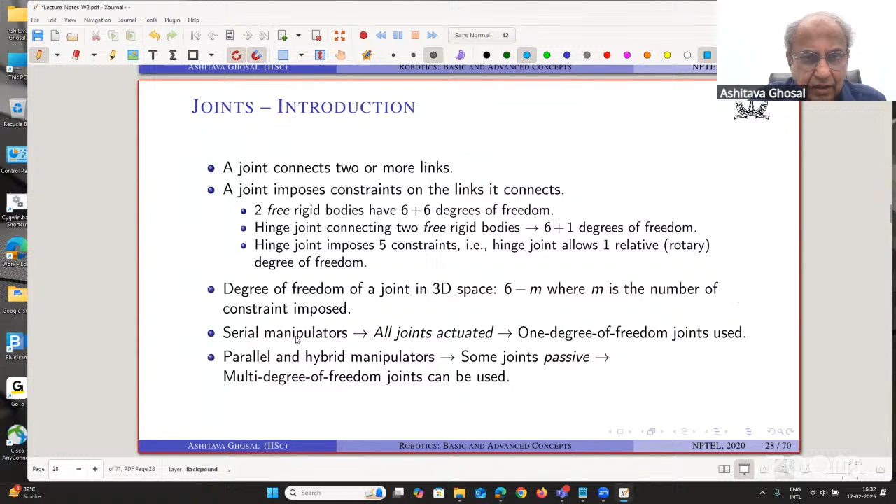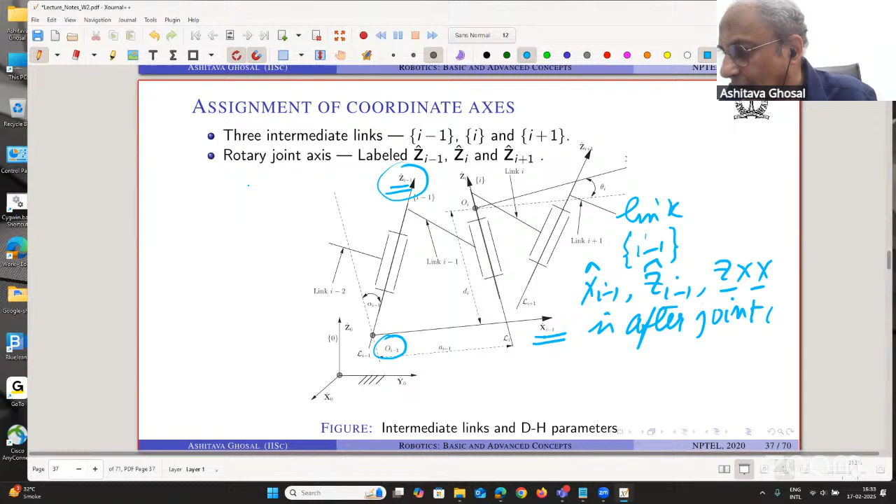So the whole idea is link I minus 1 is after joint I. So this is joint axis I minus 1, this is joint axis I, and this is joint axis I plus 1. So this link is after the joint.

As I was saying, for link I, there are 4 DH parameters. One is alpha I minus 1, which is this twist angle. Then AI minus 1, which is the link length. And then there are theta I and di.

The problem is in any convention, some of these have I as subscript and these two have I minus 1 as subscript. Yes sir, okay, so this is confusing to everybody.

So in order to avoid this, some people will say the link is before the joint, then this is labeled as I plus 1, all kinds of things they will do, but you can never avoid this problem. So what I am giving you is this convention where two of them have subscript I minus 1 and two of them have subscript I.

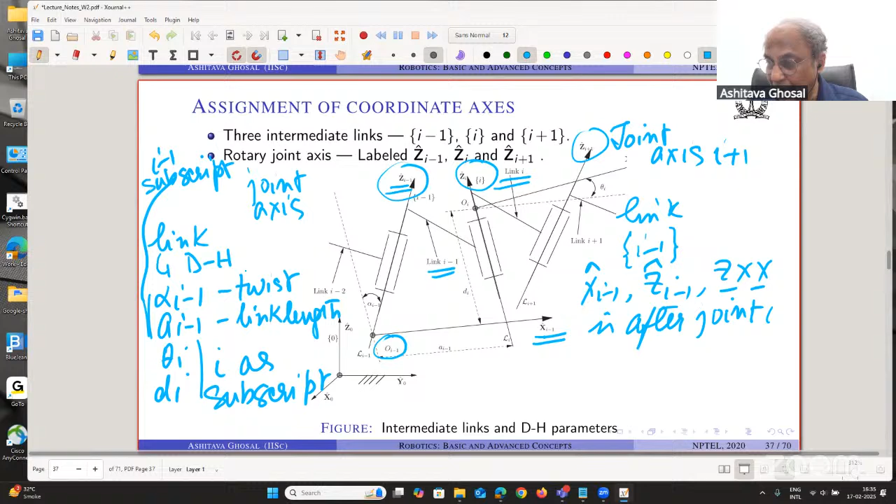The advantage of this convention is that out of these 4 DH parameters, as you may have also read in Saha's book, 3 are constant and 1 is the variable.

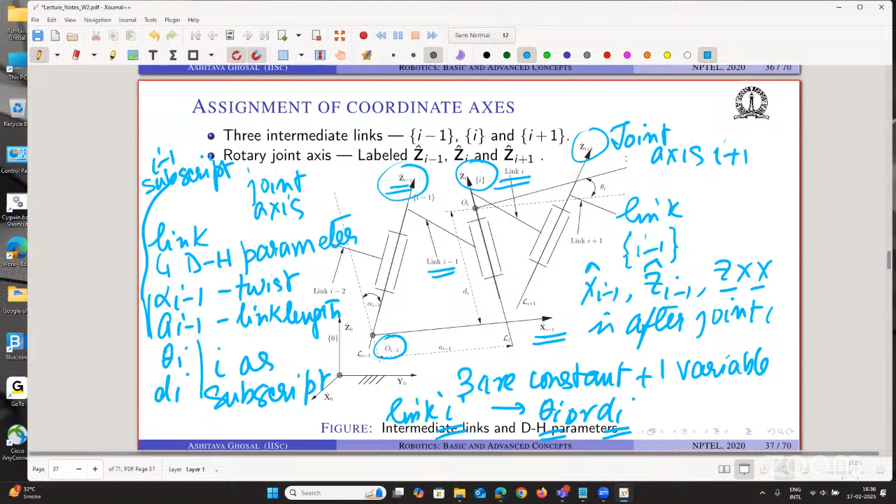So for link I, the variable is either theta I or di. So at least this I and this I and this I are consistent. This is the big advantage of this convention, that the variable for link I has a subscript I.

Okay, so this is one advantage, and then there are some other advantages. One is that if you have what is called a tree structure, this is the only convention which works. Do you know what a tree structure is? No sir. Okay, I will show you.

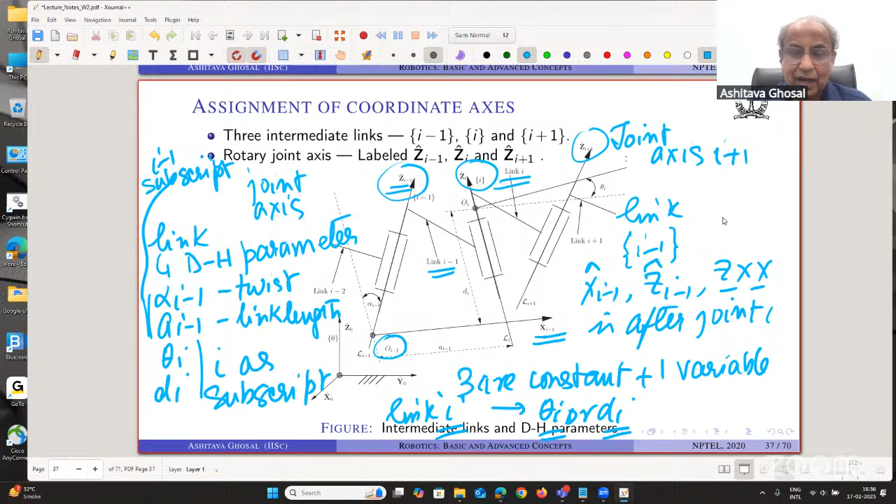So once you have this convention, then there are these 4 DH parameters. As I said, this is for link I, but unfortunately two of them have subscript I minus 1 and two of them have subscript I.

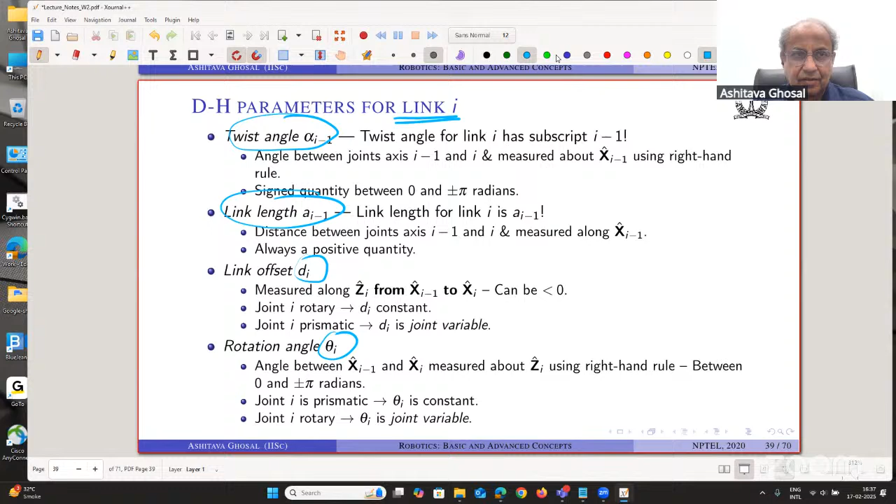So let me just show you what is a tree structure and where this doesn't work. Okay, just give me a minute.

I think if you go to week 8, week 8, no? Is it in week 8, right? Is it in articulated body, week 8? Yeah, articulated body. Week 8 slide, slide number 71. No, no, yeah, it's week 8.

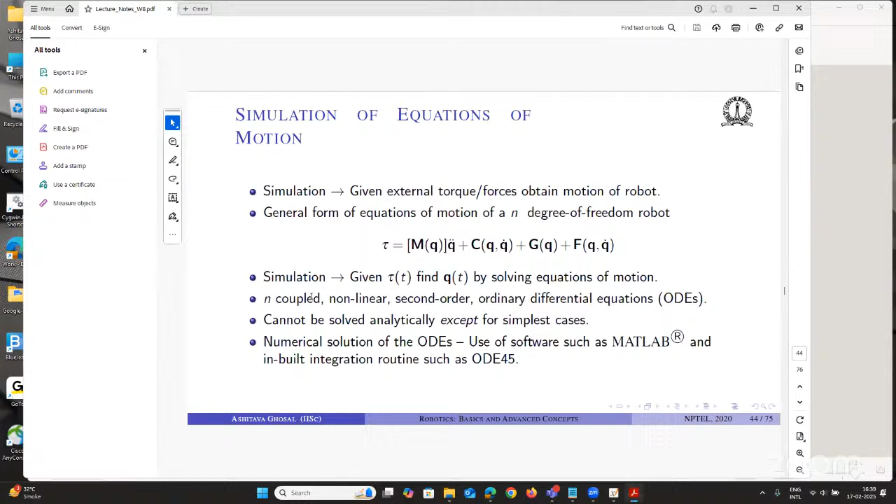So if you have a structure like this, there is one fixed node and then it is connected to two arms. So you can think of it as like your body. This is what I wanted to show you. So in your body, there are two arms, one and two.

Okay, so if you look at, let's say, node 7, which is joint 7, so if it's like this, you don't know where you are coming from. So if your link is before the joint, okay, this is one way of doing it, but let me just try and find one more simpler way.

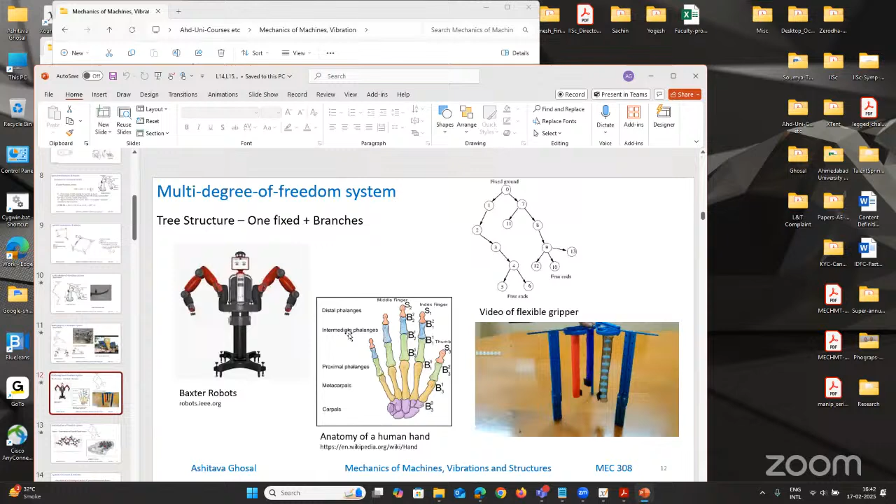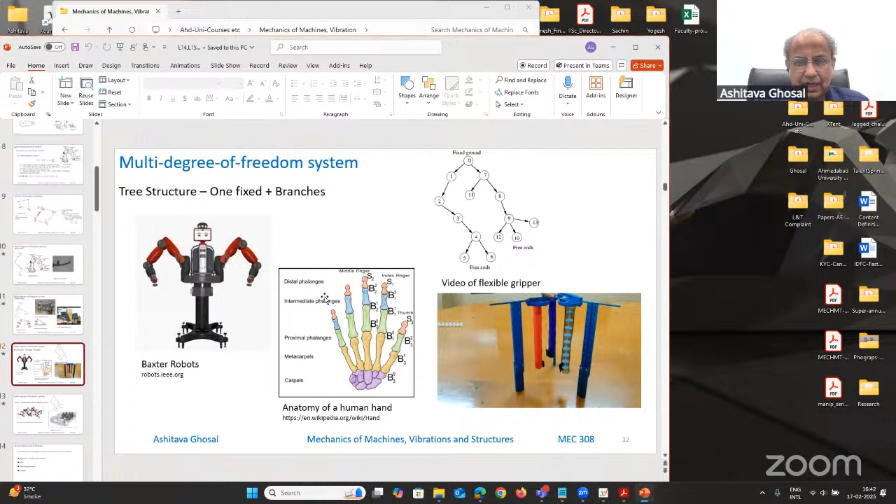Yes, sir. Okay, so you see any of these three pictures. So this is the anatomy of a human hand. Okay, so if this is my joint, this is like the palm. Okay, so if the link is after this joint, okay, so from here, you don't know where you are coming from.

Sorry, if the link is before the joint, with a zero fixed ground, sir, for example, this joint here, okay, you can have one link coming here, or you can have seven, many branches which are starting from the same place. So in a tree structure, from this fixed point, there are many branches. Okay, so I can easily, following my convention, say that this link is after this joint. But if you use Saha's convention, you will have problems.

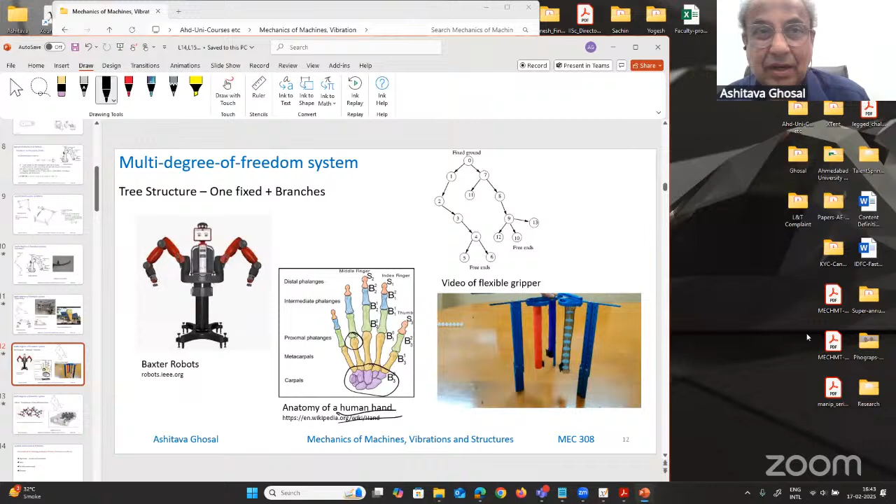Okay, sir. Anyway, so it doesn't matter. It is, as far as these normal things are concerned, the same. Okay.

So let's go back to this. So this is the DH convention. Is this clear now? I'll show you some examples after this. Okay, sir, yes, it is clear.

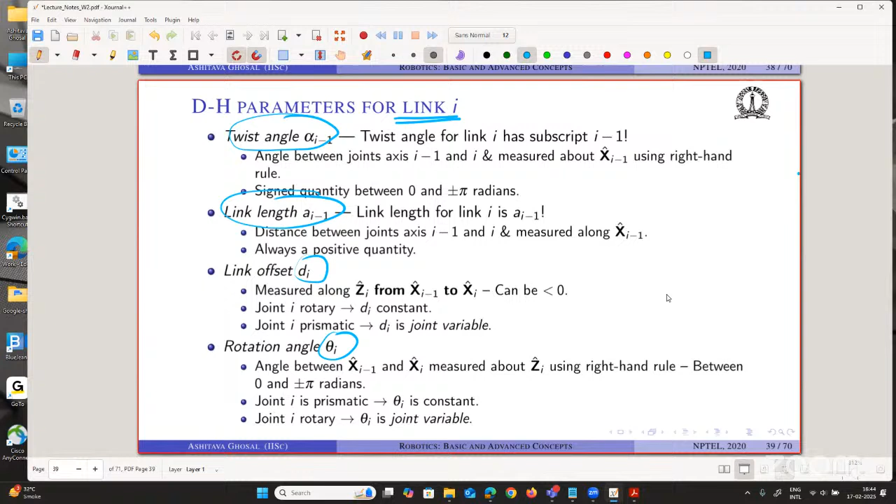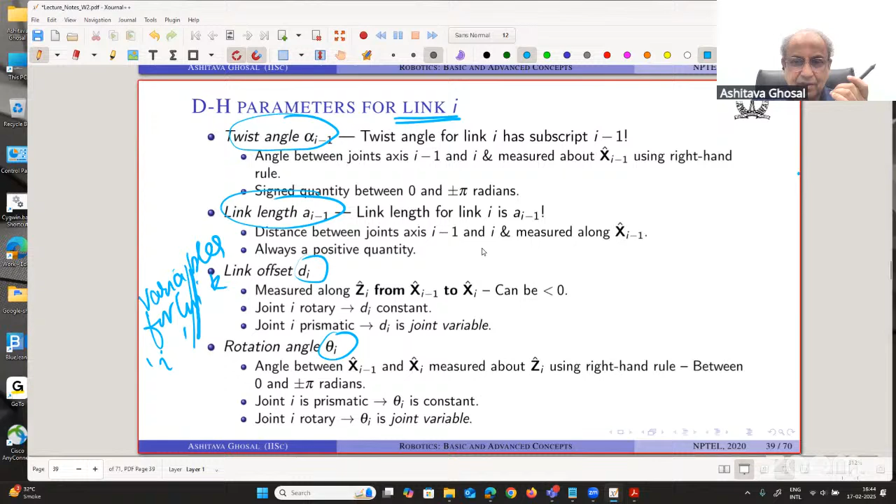So there are two quantities which are with I minus 1, and there are two with I, but fortunately these are variables for link I. Okay, so it is good that way. The constants have other subscripts.

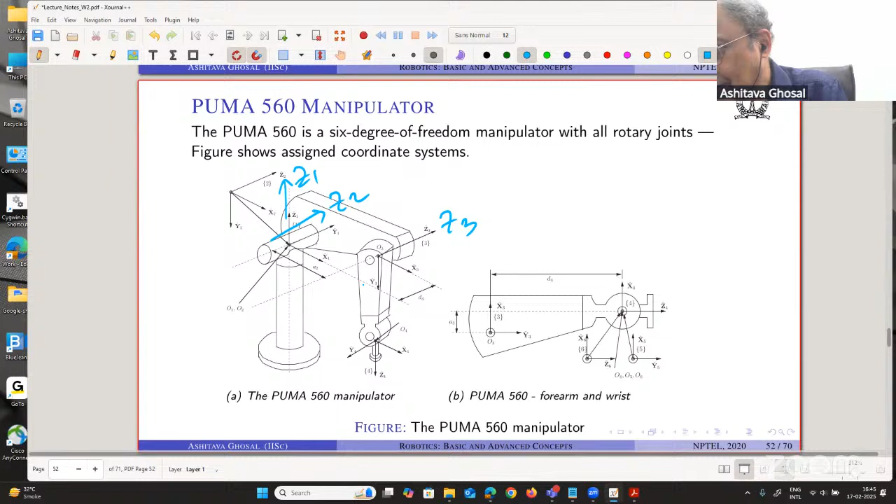And hence, when you do the DH parameters, for example, for link 2 - so which one is link 2? This is link 2. Okay, so for link 2, you can see that there'll be some distance and some angles. So for link 2, it is minus pi by 2, 0, 0, because it is the angle between Z1, which is upward, and Z2. So it is this angle.

Okay, sure, so alpha I minus 1 in this example is minus pi by 2, either 270 or minus pi by 2. And what is A I minus 1? This is the distance between Z1 and Z2, that is 0.

Yes, okay sir. And then you have theta I, which is this angle theta 2, and then you have D I, which is constant. So this is for link 2, the way we have drawn it, and this is link 2 after Z2. Okay.

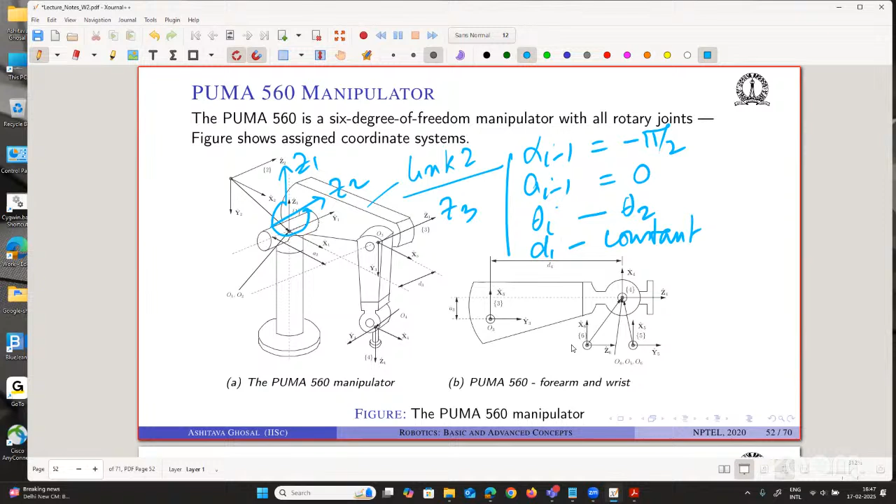So you have to give me some time. Actually, Jacobian will come a little bit later. So we are in week 5 right now. So in week 6, next week, Jacobians will come in. So maybe you can wait, or maybe you can read ahead a little bit because all the material is already there.

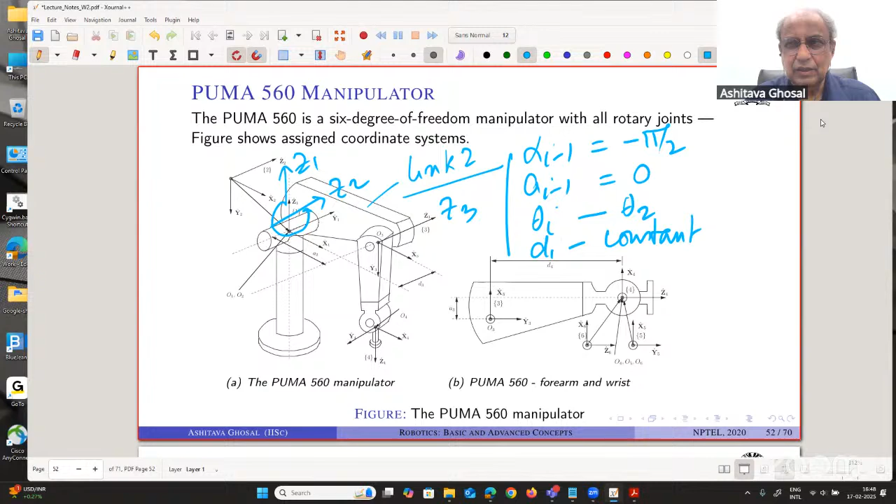Okay, so but you need to. The coming week will be velocities and all those things. Okay, fine, that will be when you have the Jacobians. So. Yes, sir.

I need to come out of this. Let me just try to come out of this. No, it's not working. Okay, I will come, I will do this.

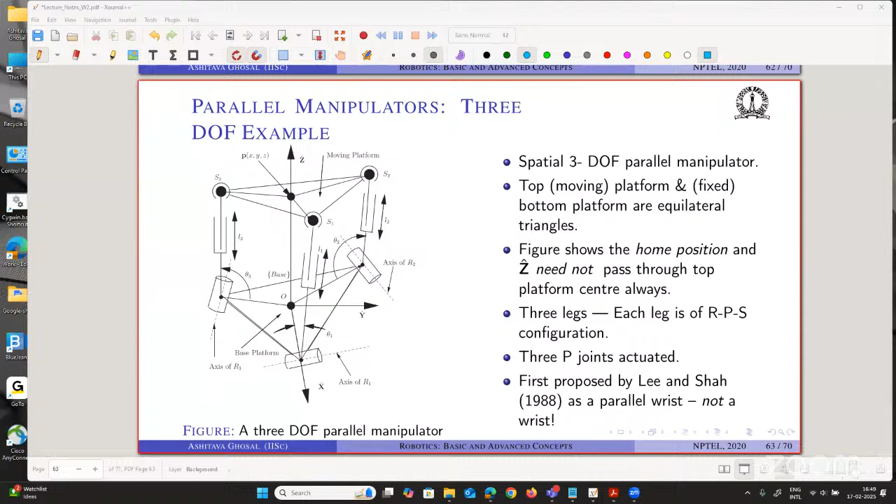Okay, so now let me share the screen. Can you see? Oh no, this is.

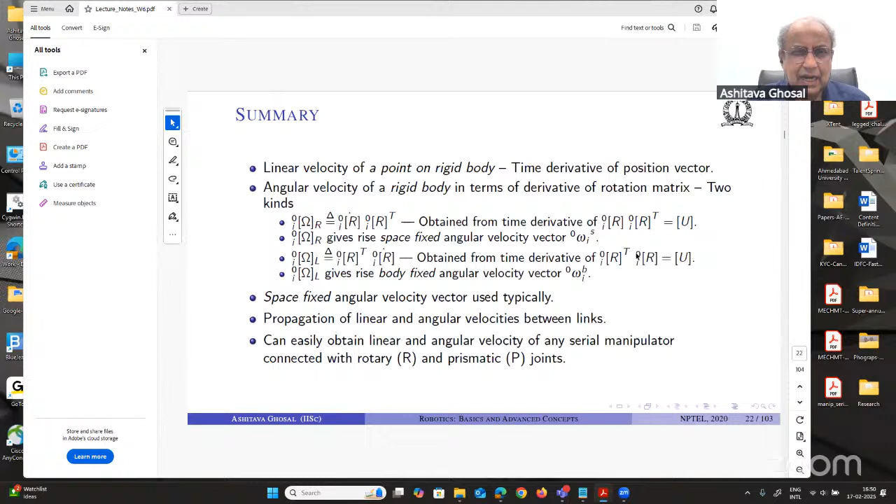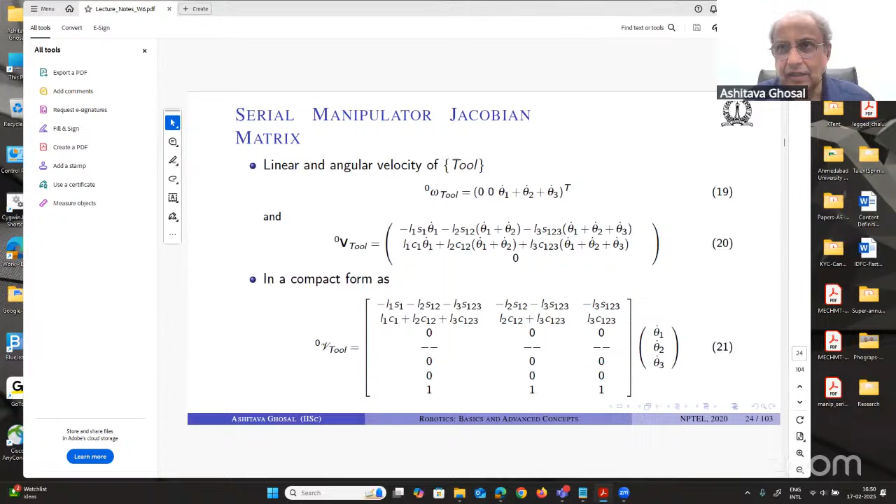Okay, so the basic idea of a Jacobian is that basically I know the angular velocity and the linear velocity of the end effector. So for example, the angular velocity, this is for a planar 3R. So this example is for... as usual, I have not done it properly. Just give me a minute again.

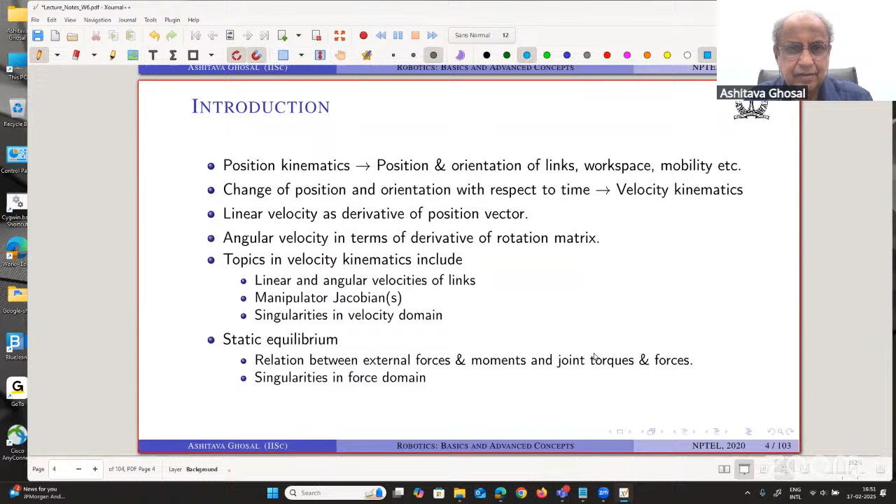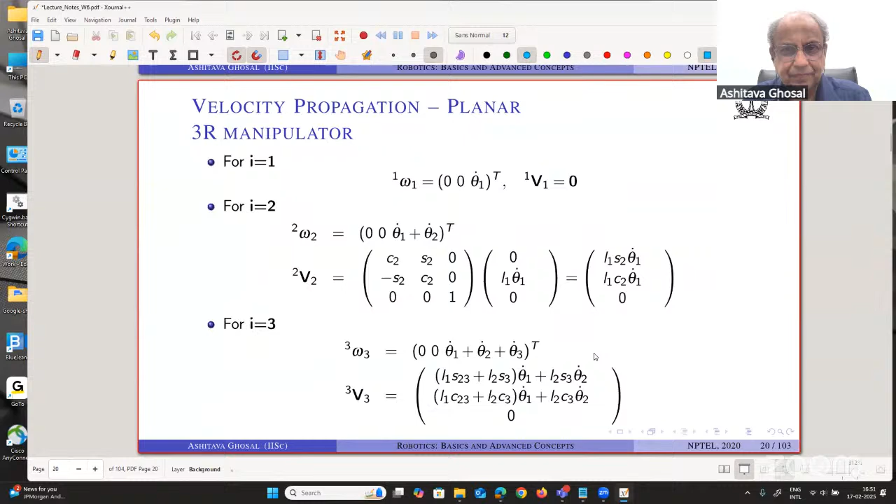So in this, for this end effector, this is the angular velocity. This is the zero coordinate system, x, y. You can see, this velocity is from the origin, fixed, that is why this zero is there.

Okay, so it's sort of easy to understand that the angular velocity of the end effector will be theta1 dot plus theta2 dot plus theta3 dot about the z axis, which is this. And the x and y components will be zero.

Similarly, the linear velocity of this point will be this. There'll be some x component, there'll be some y component. And the z component will be zero. This is the z component.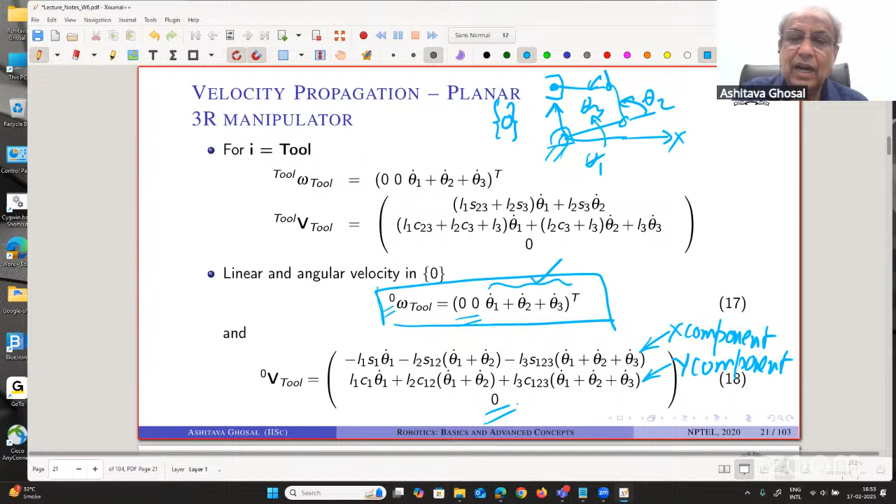So the idea of a Jacobian is that I want to write this linear and angular velocity in terms of joint velocities. So end effector angular velocity and linear velocity in terms of joint velocity.

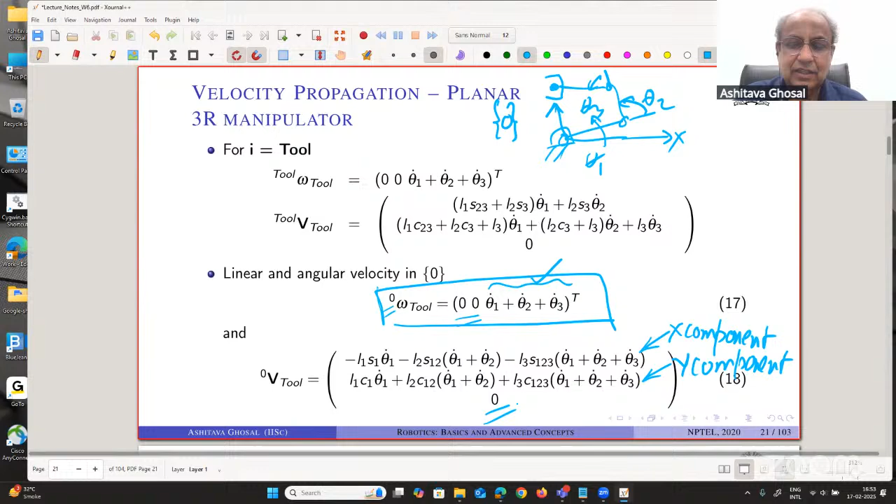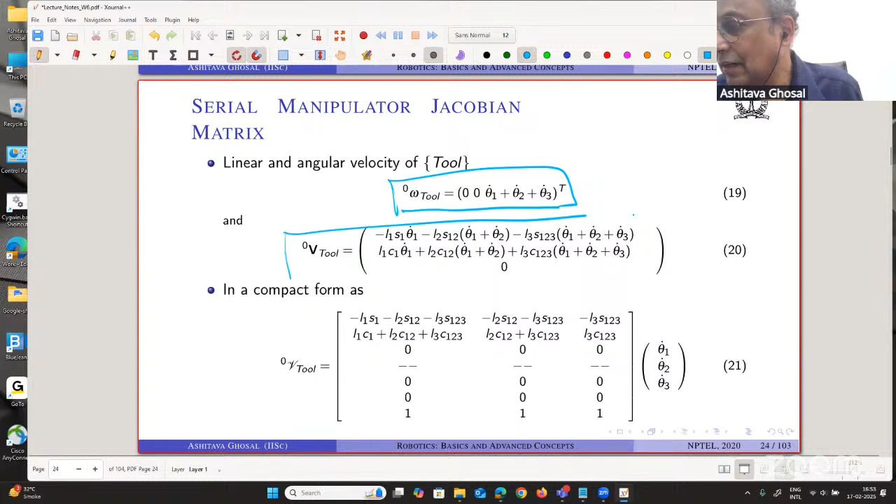So once again, this is the angular velocity and this is the linear velocity. You can see this is a 3/1 vector, and this is also a 3/1 vector. So what I want to say is this quantity on this side is v, the linear velocity of the tool in the zero coordinate system, and this is the angular velocity of the tool in the zero coordinate system.

And this is given... this symbol means that. And we can reorganize these 3 plus 3, 6 equations in this form. So this matrix is called the Jacobian matrix.

But here the end effector is also considered? Then the matrix will be different? No, the end effector is being considered, L3 is here. So in this picture, this is the end effector, of course, for this planar example.

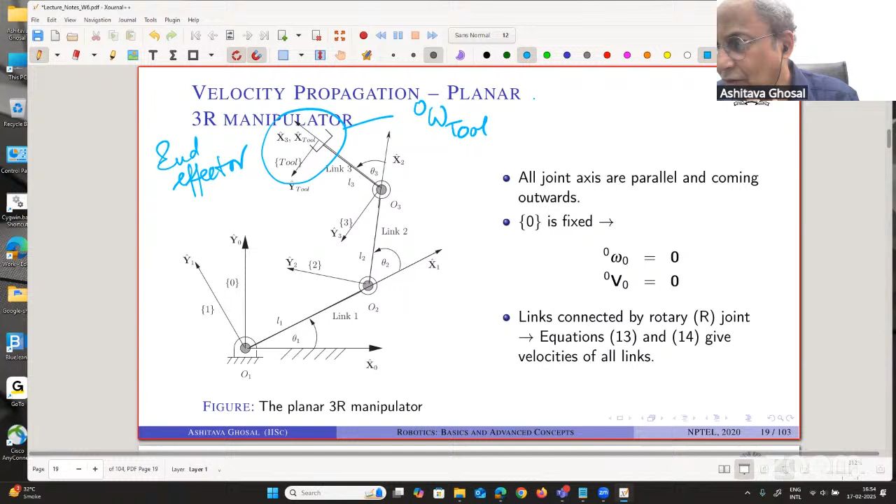Okay, so I am trying to write the angular velocity of this end effector. In this case it is called the tool, and also the zero v of this tool, which is the linear velocity. So this is like a vector 3/1, and this is also another vector. So I'm trying to find out both of these.

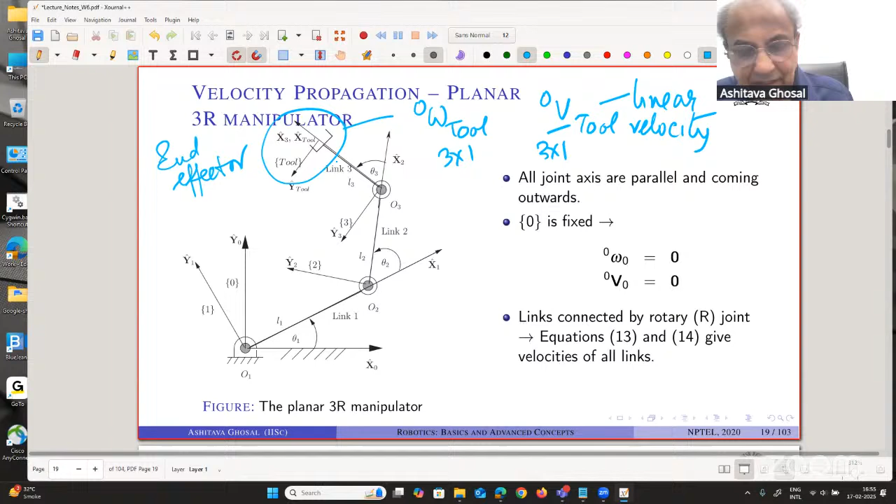And at least my claim is that this is the angular velocity of the end effector, and this is the linear velocity of the end effector. Okay, yeah, this is very easy to see, this is also very easy to see because it is nothing but the derivative of the position vector.

So instead of writing it like one vector, two different 3/1 vectors, I am going to write it as a 6/1 quantity. This is a 3/1 vector, and this is a 6/3 matrix. So this is the Jacobian matrix.

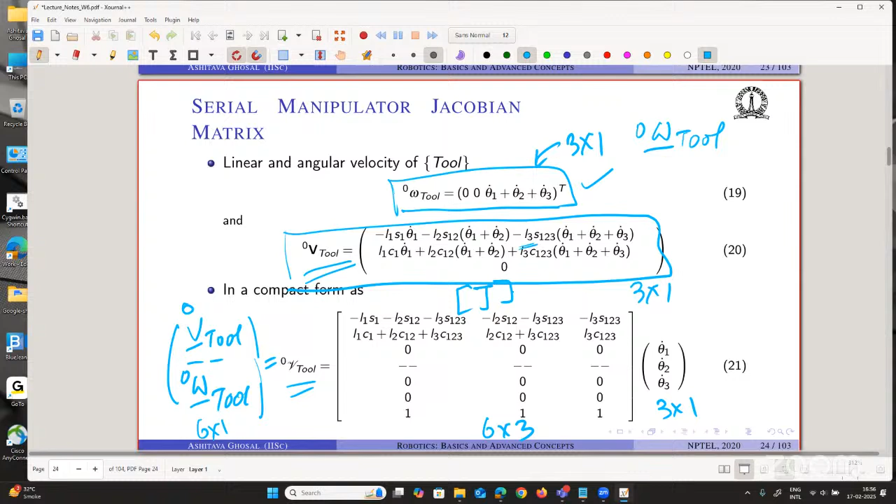Next week it will be taught in more detail, so have patience and then you can see. Okay, anyone else? I see some Ramji. Good evening, sir. Good evening. So do you have any question?

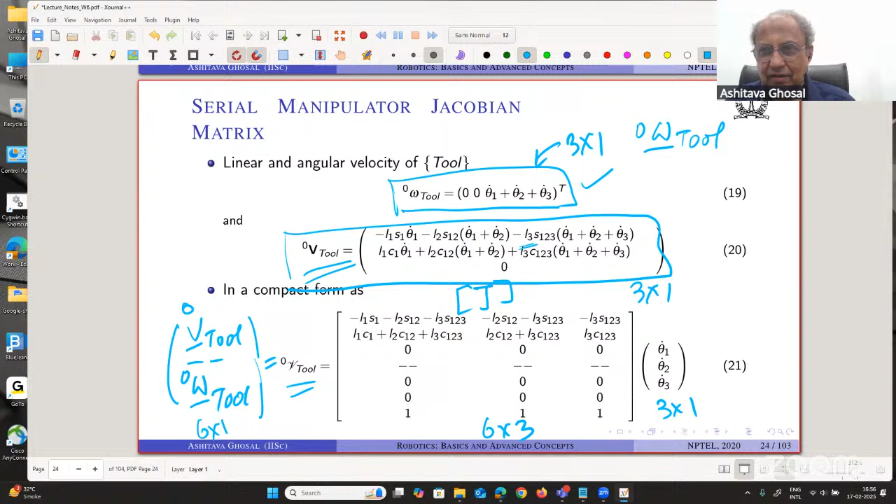Sir, I have taken this course after your introduction in the DMSF smart factories course. I wanted to delve into more depth, that's why I had taken this. Okay, so which part of the depth do you want to see?

Sir, which part? Sir, I was actually trying to delve more into kinematics and workspace. Okay, yes. So what I'm trying to do is develop a visualization tool using NVIDIA Omniverse to visualize the workspace, so for that I was just programming on my own.

Okay, very good, I thought yes. So how much have you done? Can you show us? Sir, next session I'll try to show.

Okay, yes, thank you. So the basic idea in the workspace, at least again, the simplest thing is, this is the simplest idea. Let me just share how you can find the workspace.

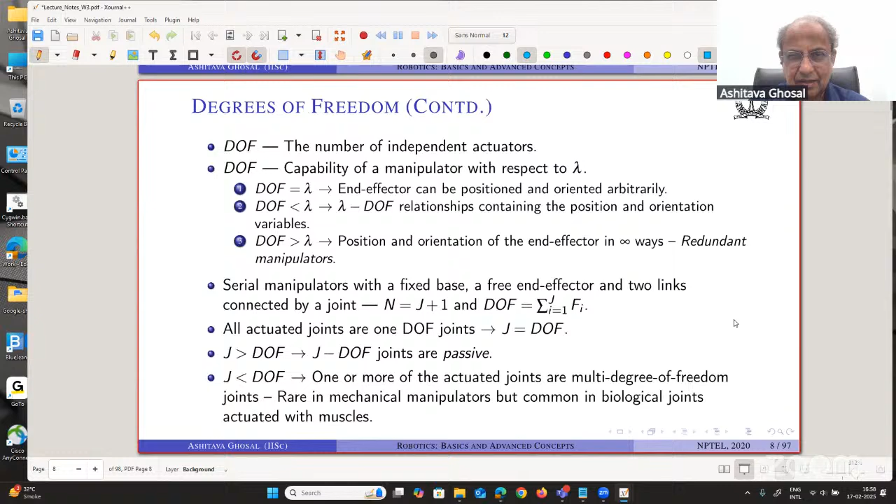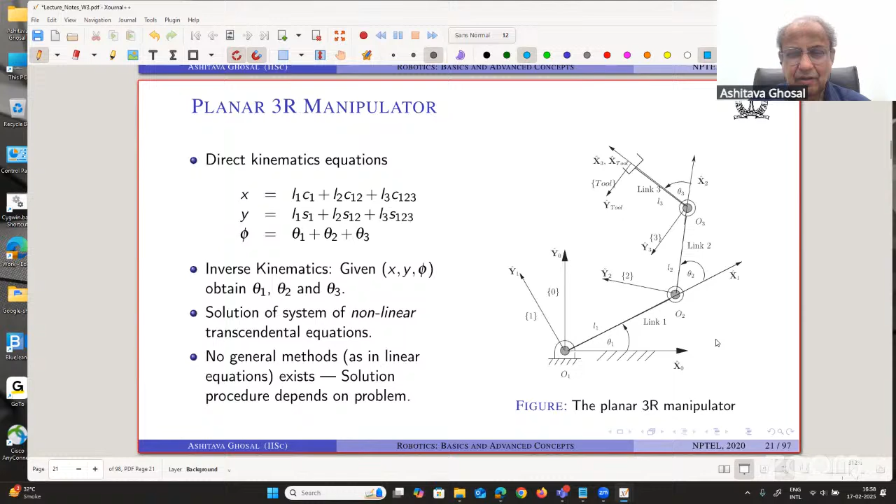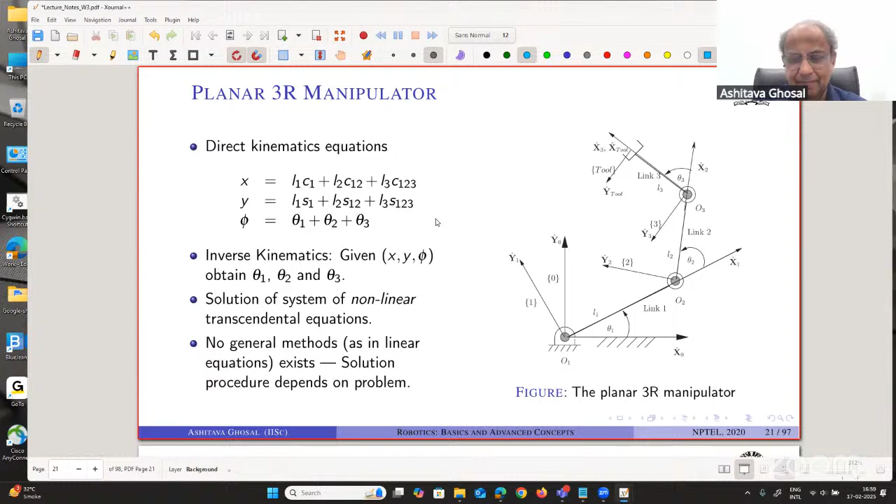Okay, so very deep down, the workspace comes from inverse kinematics. That is the first important point. So what is the workspace? Workspace is basically where the inverse kinematic... and of course I'm taking this planar 3R robot, but all X, Y, phi end effector position and orientation, where the inverse kinematic solution exists - that is the definition of workspace. And for this 3R case, this is the condition.

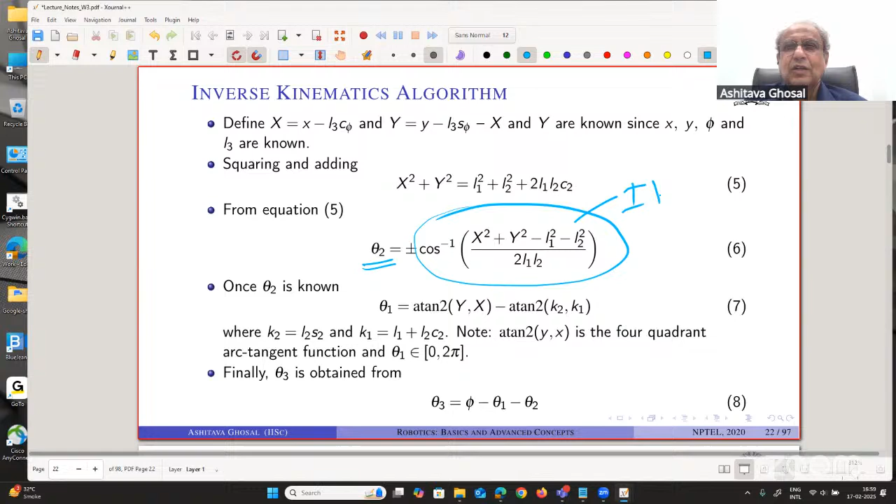And where is it coming from? It is coming from this expression that theta2 is this quantity here, cos inverse of something. So this has to lie between plus minus 1. Cos inverse of 2 is not allowed - it is not defined. So this has to lie between plus minus 1.

And then what is this x and y? If you go back and see the notes, x and y is nothing but the small x and small y minus some L3 cos phi and L3 sin phi. And L3 is the link, top link length, last link length, and phi is the orientation. So it is basically a family of circles. This is a circle. If you substitute here, what is small x minus L3 cos phi whole square plus small y minus L3 sin phi whole square. So it is like circles with different origins.

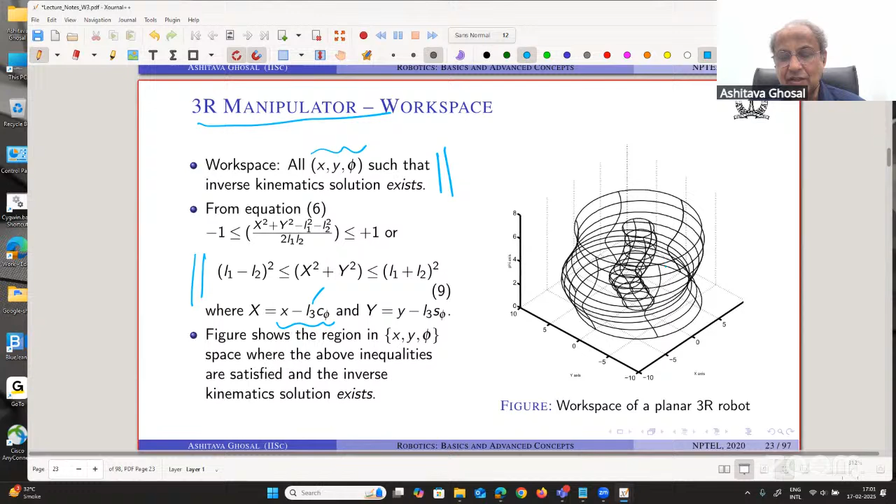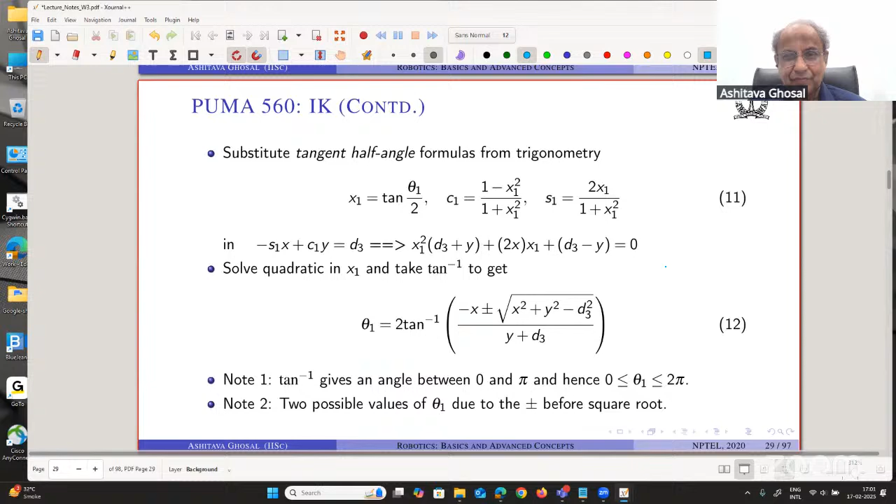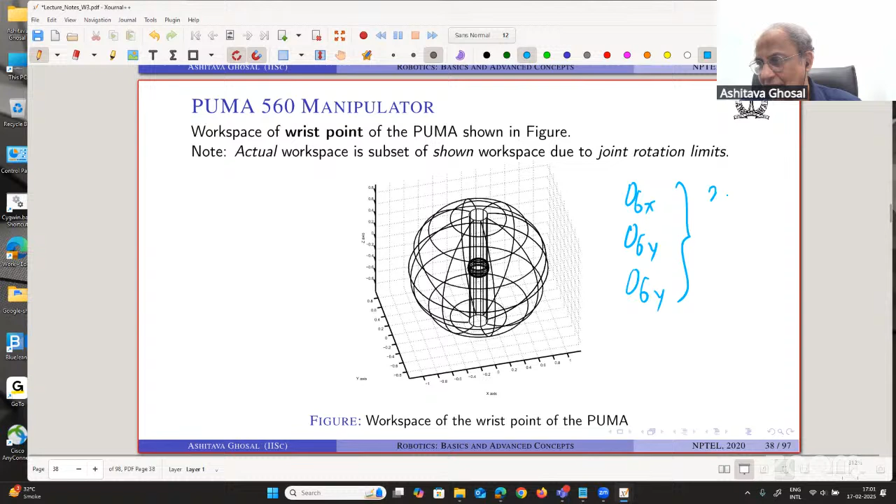If you take now a complicated one, like let's say this robot, here also it has something to do with when does the solution exist. And in this case, the solution only exists if that wrist point - wrist point is O6X, O6Y, O6Z, this is like XYZ of the wrist - lies between, this is one sphere, and this is another sphere, smaller sphere. But in between, there is a cylinder.

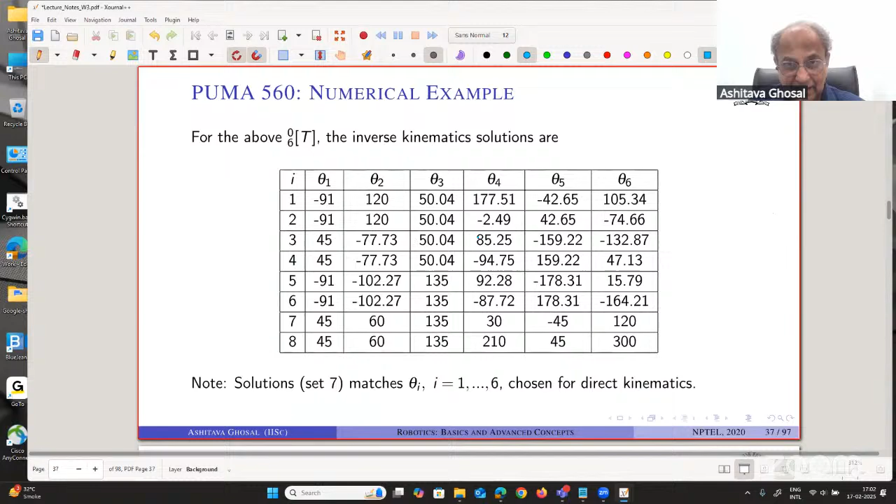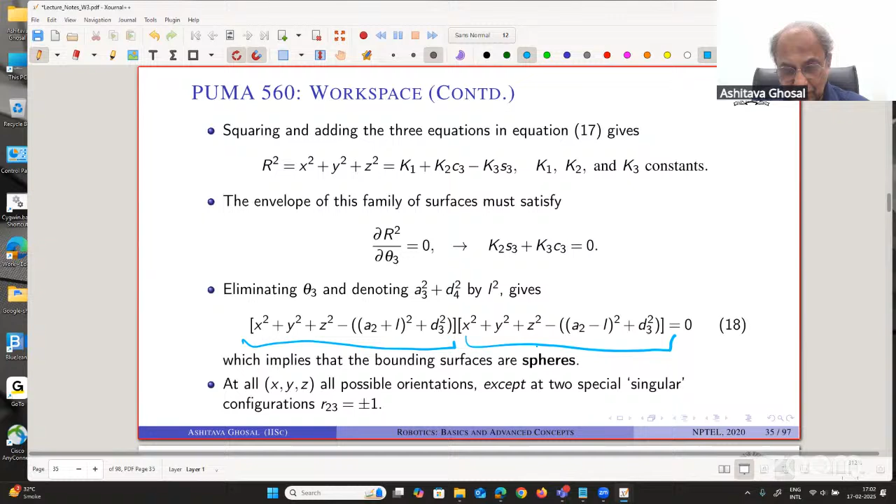And those are not necessarily - you don't have a nice analytical expression. They just do it by trial and error. You can just do forward kinematics. You give values of theta1 0 to 2 pi, theta2, whatever is joint limits of theta1, theta2, and so on. And then you find out all x, y, z and orientation where it reaches. So that is the way it is done there.

So in effect, we are doing forward kinematics to find all the workspace - yes, that is the easiest way to do it. So if you do it with a very small step size of the angle, it will take a lot of time. So if you do every 1 degree, it is like 360 to the power 6. But it's not that big a deal nowadays, so you can find the entire workspace.

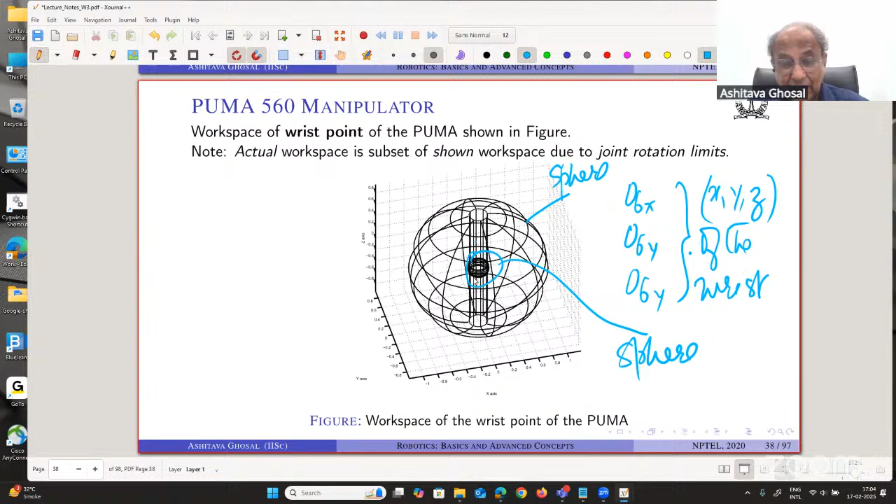Sometimes you can find analytically, like in this case, two spheres. But most of the time you have joint limits. Right now in this example, there are no joint limits, that's why these two nice spheres are coming. But if you have joint limits, you will have complicated shapes. The joint limits are due to collision - no, and also because the robot cannot move freely.

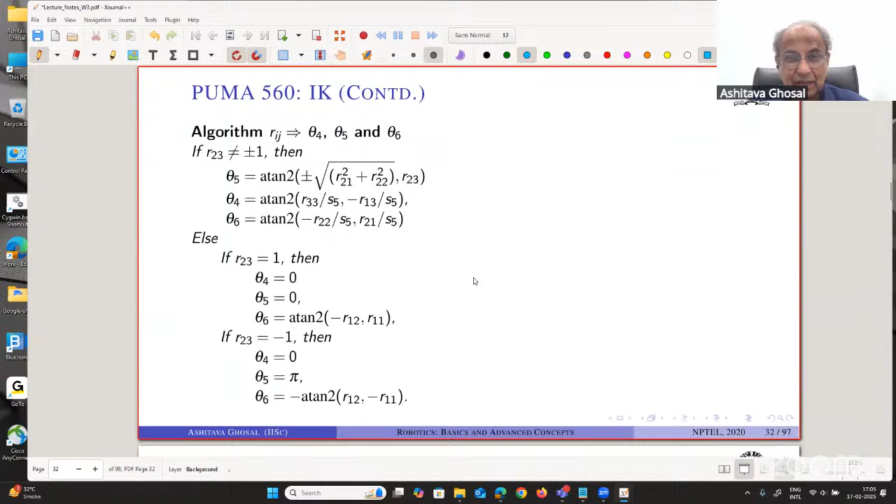So every robot - for example, this robot here, see this robot, if you start moving it, it will come and hit here, no? Yes. This theta3, which is about this Z3 axis, it cannot rotate 0 to 360.

So there are always joint limits.

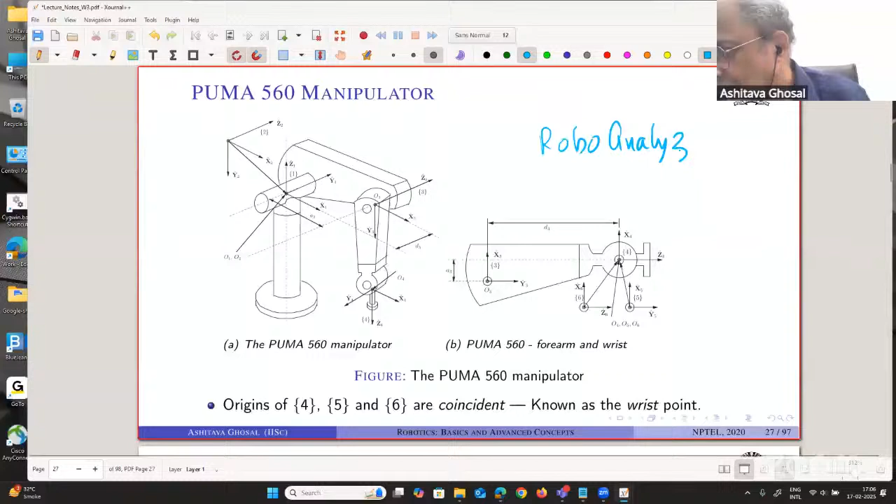There is lots of software. In fact, Nitin, you might be familiar with Saha's software called Robo Analyzer. Have you used it? No, sir. Okay, if you go to Professor Saha's website or search Robo Analyzer on Google, you can find it. They also do the workspace of many common robots, not all.

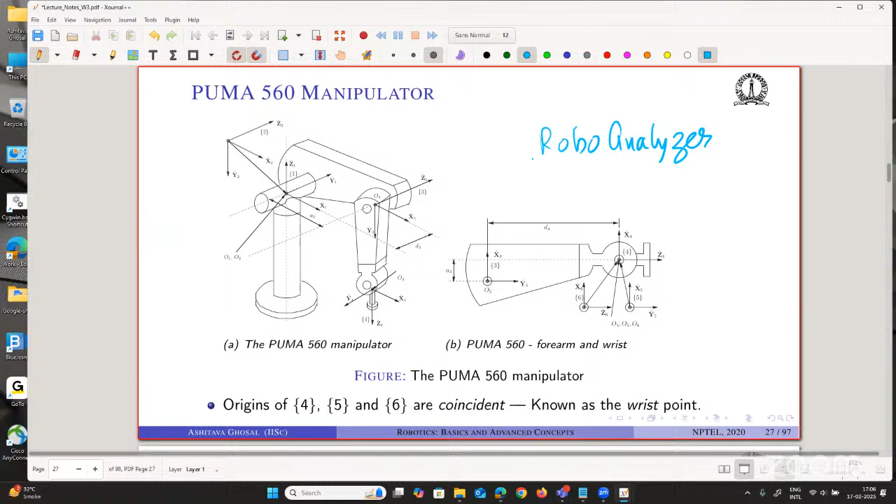There is also a free software tool called Robo DK, which is what the other student Ramji was talking about. You can download it, and there's a free student version. Even MATLAB has a robotics toolbox you can use. Is it good? More or less. Does it give the workspace?

They can do inverse kinematics and all. I have not used it directly, but does it give nice pictures? Robotics toolbox, okay I see. It has default models already programmed, but for others you give the DH parameter values and it will draw it, then you can do inverse kinematics, forward kinematics, everything.

Any other question, Ramji? No, sir, nothing from my side. You can send email to the TA, or put it up in the forum also. Nitin, and other students, if anybody else is listening, you can put it up in the forum.

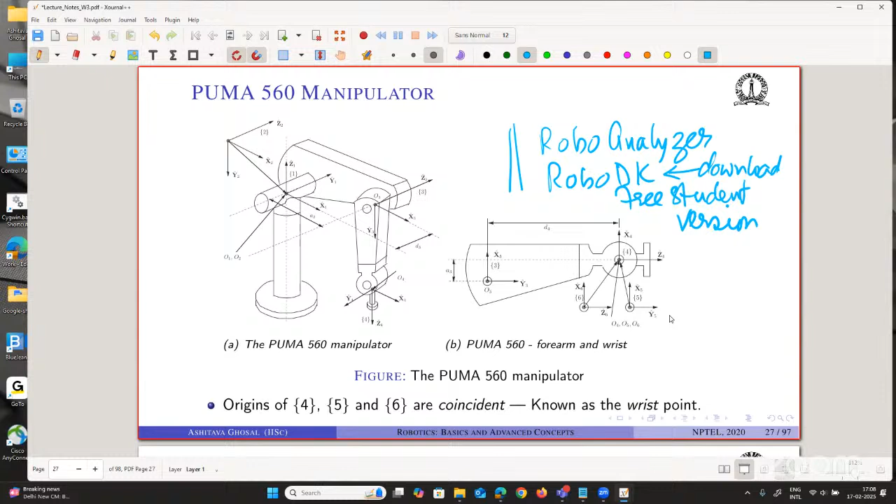I see there is one Rajeshri. Rajeshri, welcome to this session. Do you have any question? Rajeshri Rajan, okay, are you there?

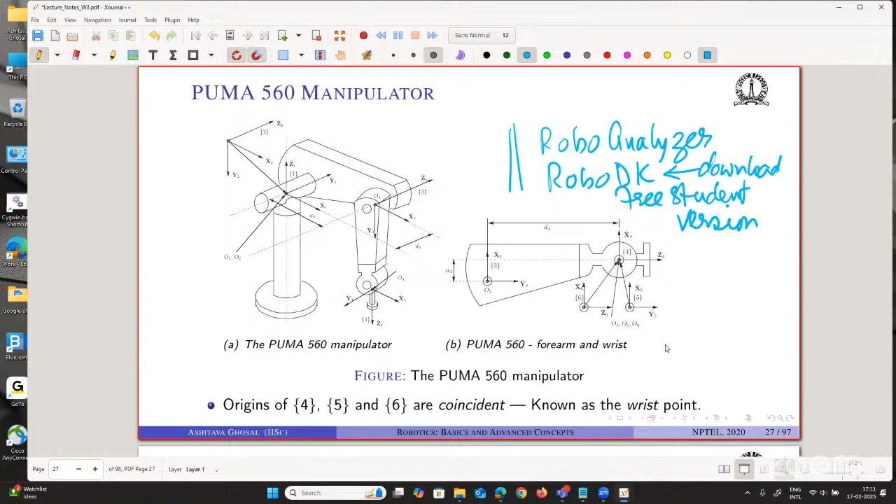Yes sir, let me share my screen. I'll just show one thing I did in MATLAB. So like these are... okay, I'll stop. You can share it, they can see it. Can you see? No, you have to share. Okay, I'll stop sharing, you have to share the screen.

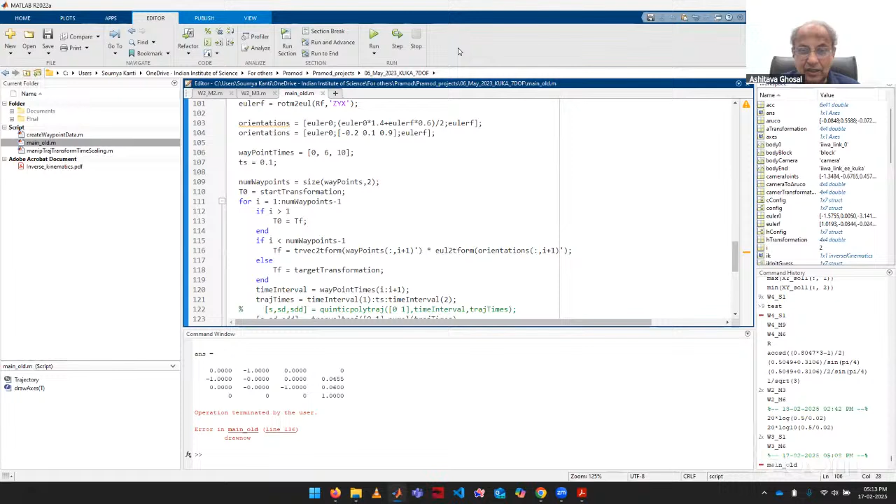Professor, just a general question. How is the dynamics and control of mechanical systems different from this course? I have been through the introductory lectures on that as well. Is that more focused on kinematics and control? No, dynamics and control of mechanical systems is quite different, in the sense that you go into much more depth in dynamics, and we don't look at robotics. For example, inverse kinematics and forward kinematics are not done there.

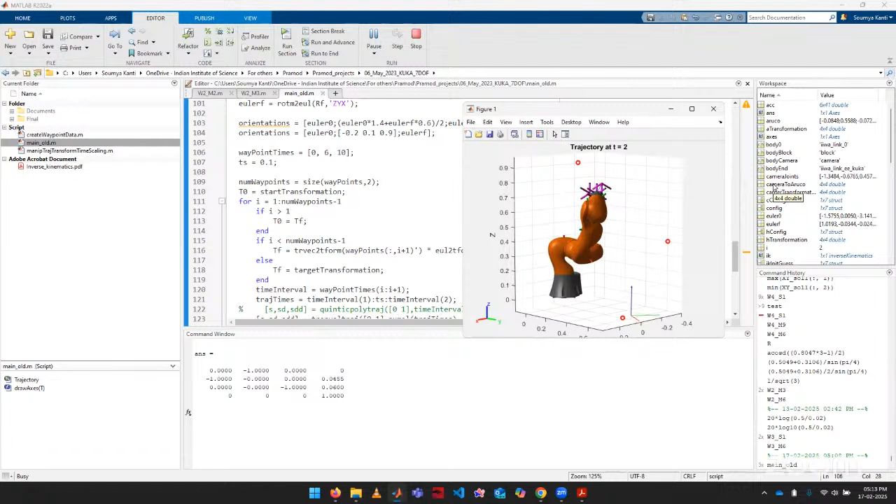Yes, now we can see. I think some KUKA robots are shown here, so you can do inverse kinematics and have a visualization as well. That's nice, I didn't know this. Again, it is like MATLAB. By the way, everybody should know you have access to MATLAB, all the modules.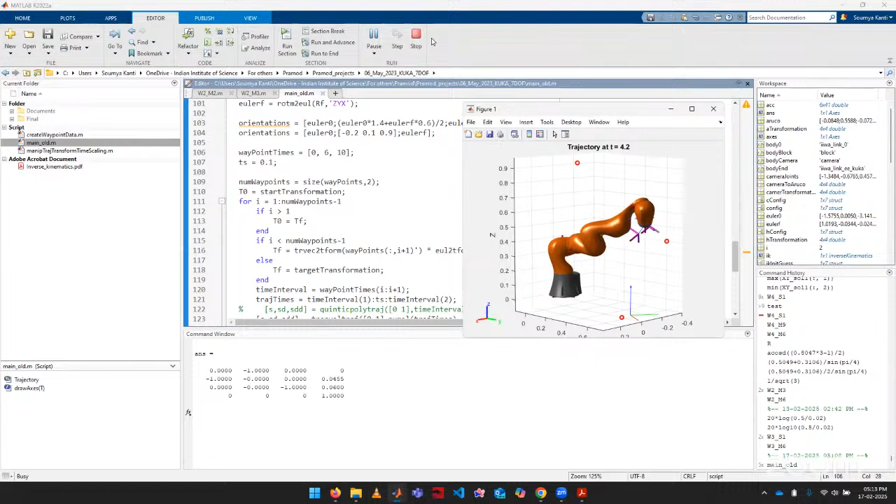In the dynamics and controls course, we do a lot of controls and a lot of dynamics, but very little kinematics. In this course, we do a lot of things like Stewart platform, parallel robots, which is not done in the dynamics and controls course.

Thank you, Professor. Yeah, I think, okay.

So Rajeshri, I didn't hear any question from you. Do you have any question? No, sir, no, sir.